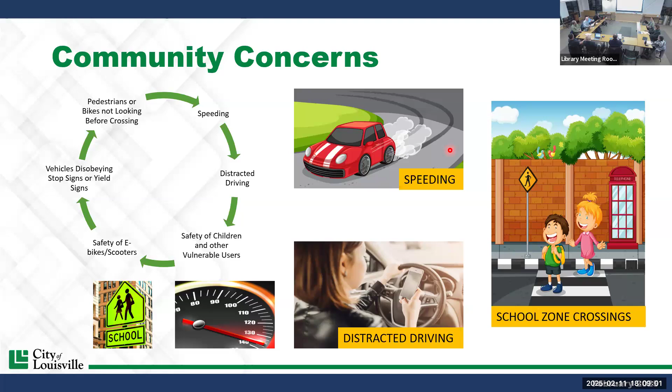Cover a little bit of the terminology here that you'll see throughout the slides. So all ages and abilities, we go from 8 years old, which is about the beginning of independent bike riding and walking here in town, up to 80 plus year olds. When we discuss the 85th percentile, that's the speed at or below which 85% of drivers are traveling. It's a metric that we tend to use for gauging. It's an industry standard, and it's a gauge for vehicular behavior and observation of traffic laws. Yes, sir. Is that the middle or is 15% above? So 85th and below will be what we look at. 15% are going to be in excess. Just want to know where the curve was. Yeah, thanks.

And then we're going to talk a little bit about the ADT, the average daily traffic, which is the amount of traffic on the street each day. FHWA is the Federal Highway Administration. They provide a lot of the public funding that we see, federal dollars. They administer that, but they also administer and keep track of and make recommendations that we'll touch base on a little bit later, countermeasures, traffic calming, traffic safety, and try to set a standard nationally. And then the TMP, it's our Transportation Master Plan adopted back in 2019.

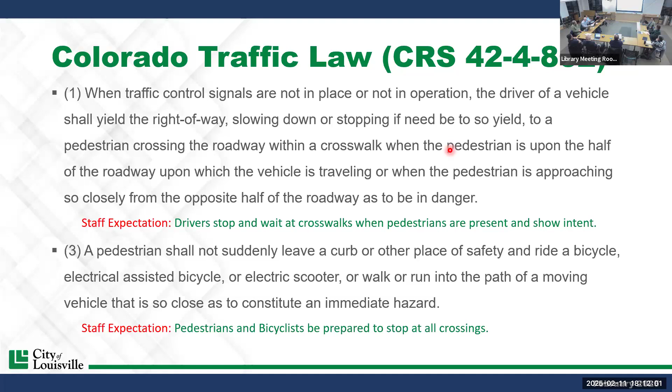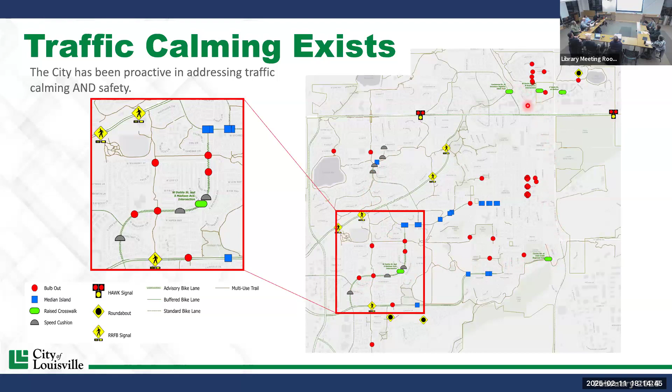Next, we'll touch on some proven safety countermeasures. So this is FHWA. In this slide, you can click the link. We could share that link if you guys want. You can also Google it. And there's 28 of them currently that are a variety of ways to improve safety on the streets.

These are examples of some that exist here in Louisville. So we've got RRFBs, the HAWKs, again, the raised crosswalks. These median refuge islands allow people to make a decision point in one direction, get to a safe place, and then make a decision point again the other way. One thing to note, just on the HAWKs and the RRFBs, is we do not recommend that they get mixed on the same corridor. Yes, Chris, go ahead.

Can you just, for the sake of everybody, explain the acronym? It is, thank you for that. Yeah, so an RRFB is a rectangular rapid flashing beacon. So those are the ones that when you press that button to cross, it gives you a blink. And what that is intended to do is alert drivers that your intent is to cross the street. While a driver is not required to stop until you've entered the crosswalk, it is ideal, it is the expectation of the community.

And the difference between that and a HAWK signal is a HAWK signal operates a little bit more like an actual traffic signal. It goes dark, and then you push the button, it'll go to yellow, then it'll go to red, it goes to its flashing sequence, and that's okay. Just like a traffic signal, when it's flashing, it's a stop sign. Does that help?

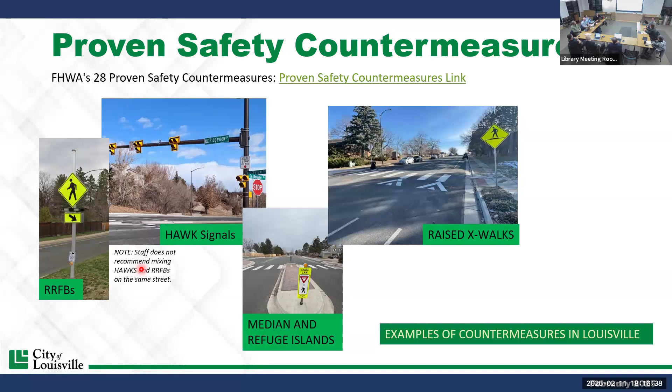Let's see. So next up, we've got some focus areas. So these are areas that we take into consideration for a variety of topics. So when we get those community concerns, we get a traffic calming petition, these are some of the pieces and elements that we're going to look at in evaluating the corridor or the need maybe for some improvements.

So again, speed management's a priority. Reducing vehicle speeds significantly decreases crash severity and improves pedestrian safety. Part of that is speed, obeying the speed limits and the traffic laws. And what we can do with an engineering aspect is try to kind of force that a little bit, and there's some elements that we can do.

And we've got pedestrian and bicycle safety to make sure that there's safe crossing options. Bike lanes, buffered bike lanes, protected bike lanes, and then the visibility for the vulnerable road users. So we also have to keep in mind we have those young cyclists, those new kids using whether it's e-bikes or their own bikes, seeking their own little bit of independence in the world, and so we've got to make sure of those. And then we also have disabled users, vision, wheelchair. So multiple users that we're trying to design our roads for, and sometimes those are competing interests.

Another topic is intersection safety, improving the signal visibility from the standpoint of traffic coming through at night. You get those little reflective visors that are starting to come in, those help. The LEDs, the brightness of the actual signal itself. And then of course the countdown timers and all the other pieces that work for a variety of disabled users or able-bodied people for when it's safe to cross.

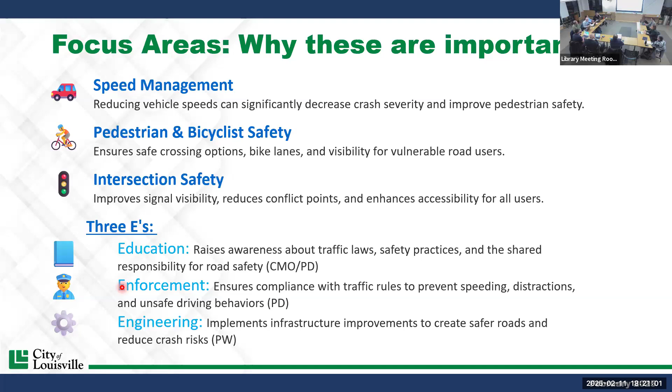Touched a little bit on intersection safety a few moments ago, but the visibility of the traffic signals is important. The ability for blind, disabled users to cross, those audible push buttons are very, very helpful. Make sure we see right-of-way compliance, and right-of-way meaning you come to an intersection, is it your turn to go or someone else's. We see those competing interests sometimes at four-way stops where it's not always known whose turn it is to go, or you come up to those local streets where stop signs aren't required or needed, and you have to make your decisions on traffic law.

But I'll note here, in the middle, a little time just to kind of brag. So this is one of our staff here in engineering, Michael O'Keefe. A local mobility company reached out. We have a blind user in town who wanted to see some improvements out at South Street with the audible push buttons.

Alerted us to one of the push buttons that was not functional. And we were able to go out and experience it, put a blindfold on, put that cane in our hands. And if y'all have never done that, I would highly recommend it. It's enlightening, scary as heck. I mean, that's Highway 42 right there at South Street. And we went across both directions.

We experienced people honking. So right here at this crosswalk, our traffic signal maintenance company, their project manager also came out and joined us, and he was doing exactly what Michael was doing and struggled really vitally to get across accurately. Car right here was laying on the horn and yelling some pretty nasty things. So we got to experience the hostility while we were out there doing this.

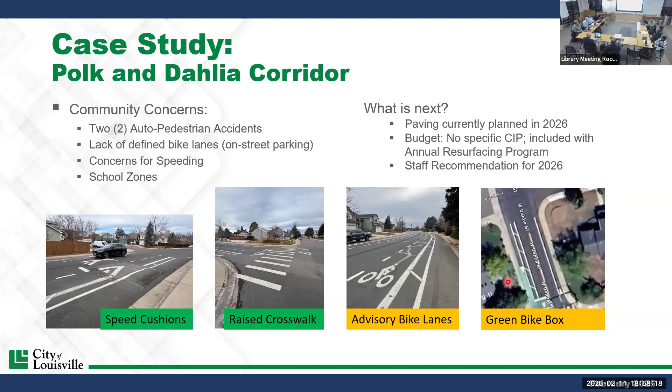Currently, we don't have any specific CIP to address any of these recommendations, but most of it falls within the normal resurfacing CIP budget. And so then we'll make that recommendation to make those approved in 2026. What I would say too on this, for questions, will be probably a great time to summarize at the end of each case study before we jump into the next one. So feel free to interrupt me, certainly entitled, but just keep that in mind.

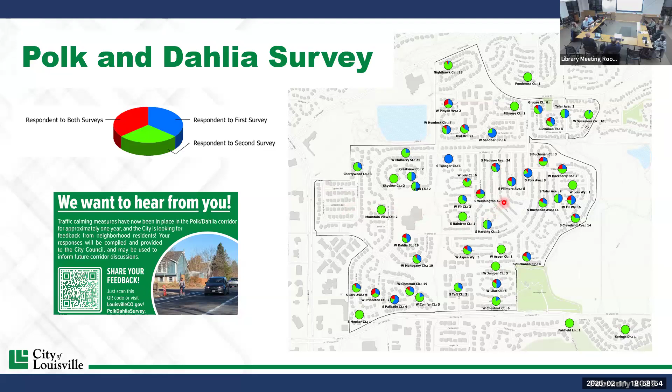So Polk Dahlia, we did a pre-implementation survey and a post-implementation survey. This slide here kind of shows you a mix: the blue is who responded only to the first survey, green is only to the second, and the red shows both. So pretty good mix of results. Touching base, so this is a feeling of what was installed. What are people's overall thoughts on what we did?

So initially we asked, hey, is there a speeding problem out here? On this left slide, out of 119 survey responses, 71% of the respondents said, yeah, we have a speeding problem. We then followed up at the end, after we implemented this and it was in place this past fall, we put out another survey, and 65% believe the speeding problem does not remain. Then we asked a couple of questions, again, pre and post.

Do you think pedestrians and cyclists are practicing safe habits? Safe habits can mean crossing. Are they looking for the lanes? Are they riding in the bike lanes? Are they riding in the parking lanes and weaving into the driving lane? And so this was a pretty open-ended question with, again, the green here, majority of people before the implementations thought that pedestrians and cyclists were practicing safe habits.

After, we actually got kind of a surprising result that more people thought pedestrians and cyclists were not practicing safe habits. That may be a little bit more citywide. We are finding that throughout the city that is now a concern. We have a lot of children, a lot of adults that aren't really coming to a stop and making sure they're safe to cross before entering. We don't know if that may be a global trend, but it is a little bit of a different result here on Dahlia. Do you have any of the specific comments that were shared?

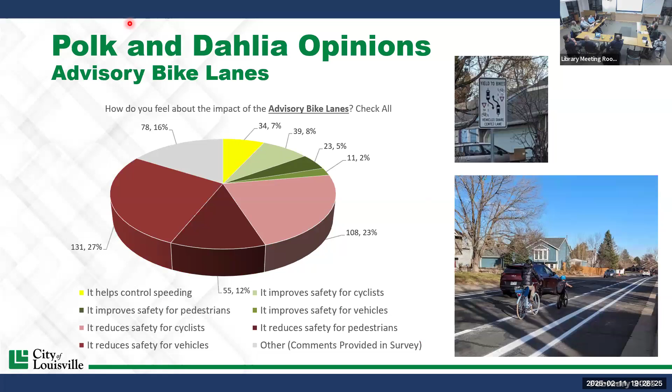I think it's about the whole corridor, and this is just a benchmark. This whole corridor carries about 3,000 cars per day. It's been out there for over a year, so do the math, that's a lot of cars. We haven't had any accidents with cars or people or bikes, despite some of the results we received. The speed data suggests people are going slightly slower, but not dramatically reduced speeds. But the perception is that there's not speeding now, when before there was. So by that account, because the reason we did this was to improve safety, we have improved safety.

That helps. Why don't we continue on, because I know you still have some slides. I really appreciate all the input. You guys have been great. I know everyone wants clean thresholds, like we should do this now or not do it now. But we are in some areas getting into levels of comfort, which is subjective, and so we do have to do a lot of reading minds to figure out what the right balance is. So this is all good.

One thing I'll add is the bikes have always been there, right? And so we add this dashed line, follow my little laser pointer here. One of the things that's a little bit unique about the Polk Dahlia corridor is it does have on-street parking. Cyclists often assume that that's a bike lane, or just want to be comfortable, and they're over in that lane until they come up on a parked car. And then in the past, without the lines we put out there, they would move unpredictably, not necessarily into oncoming vehicles, but into vehicles traveling in the same direction.

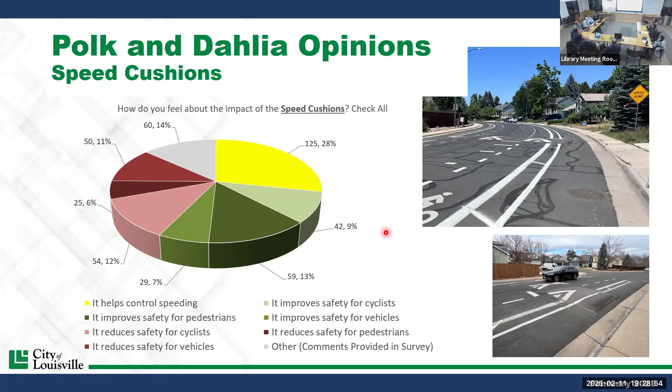So take away the speed cushion slide here for benefit. The bike lane only, the advisory bike lane versus a share the road situation. They're both kind of safe. They're both safe, right? The reality is what's more comfortable. What does the community want? What's out there? What do you all feel is the right thing? And this is one of those we can kind of submit a little bit to whatever our opinions are. And that can vary honestly between our professional and our personal opinions. So let's keep that in mind.

So one unique thing is we have to make sure that these crossings stay compliant with ADA accessibility guidelines. We have to make sure we ramp up at that 5% or less, and 2% cross slope or less, so the wheelchairs and of course the visually impaired have safe crossings. So that's kind of hard to really have too much insight into. It exists.

Barb, let's go. There's a question from a Councilmember. Yeah, thank you. Can you go back to the last slide, please, with the pie chart? Which pie chart? This one's fine. I didn't add up all those numbers, but I'm trying to figure out how to interpret this. Is it a pie chart? Because can people select more than one answer? Yeah, so they can select more than one, so it'll add up to more than the 199 that we got. Okay, thank you.

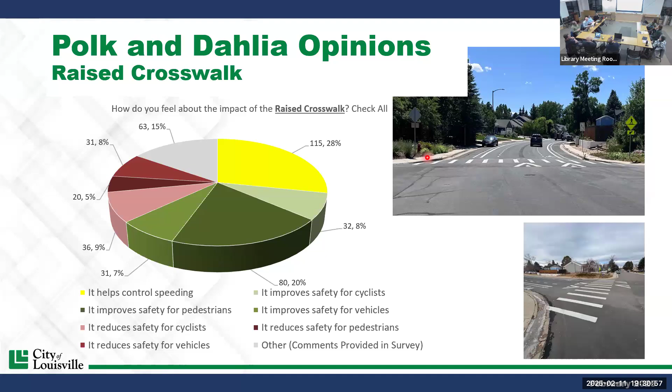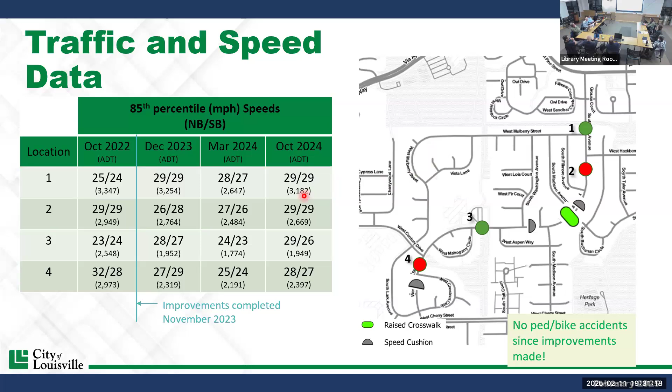Talked about the speed data. We saw an initial significant improvement in reduction, with the speeds creeping back up a little bit in the latest rendition, showing that people are getting a little bit more comfortable out there driving. So what's next? Again, recommendations that'll come with likely the 2026 resurfacing. This is kind of our feeling as staff from what we had observed from the input. We are open, obviously, to your input.

We would recommend installing the raised crosswalks at Madison, keeping that, reinstalling it once we pave, because we'll be milling everything off. Resurfacing, install the speed cushions at the same locations that exist today. Based on the feedback, initially, we're probably recommending no advisory bike lanes, more of a sharrow scenario, maybe with or without the yellow line that we see in this example here. Again, open for interpretation and feedback there.

And then the bike box that closed the through and right turn lane and made this left lane a through, right and left, and required the no right on red. At this particular location for the bike boxes, I've received no positive feedback on it, to be honest. I have received positive bike box feedback, maybe at McCaslin, a little bit more appropriate of a situation for it. But this one, I'm pretty strongly in favor myself of removing it. It just creates a lot of people taking the right, using that bike box, and I think it's creating more of an unsafe situation.

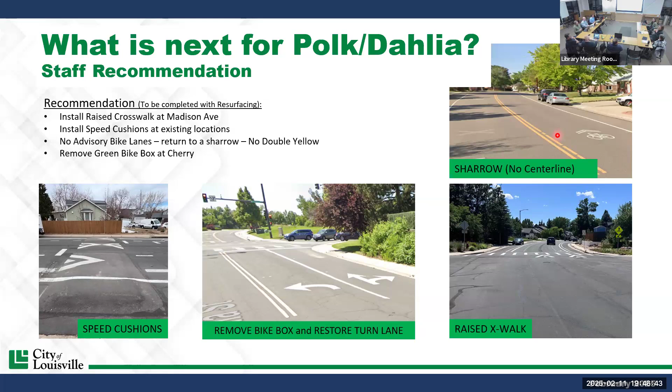Right. So, yeah. Are you taking public input? Not tonight. Right, about the middle of the road, right? Yeah, we're not taking public input. We will get public input. This is just an update. I'll send it to you about biking on the line. I appreciate that. Should we move on to the next topic? Should we keep going? Keep going. Let's go. Next slide.

All right, next traffic case study was Via Appia. We had, as you mentioned, a lot of community concern of speeding. It's difficult to slow down different side streets, pedestrian safety, comfort, crossing the street is a challenge. Then, of course, the place in which safety and comfort was not ideal. We held multiple on-site meetings on March 7th, morning and afternoon, and also held that meeting on March 11th to discuss some of the improvements to be made.

We ultimately were approved to put in the buffered bike lane. That's what this is showing on this picture here, with the buffer between the single lane of traffic to narrow this down to one lane in each direction. We also put this thermal bike box, which allows the cyclists that want to make a left turn to stay up here and navigate, get around the front of the traffic at a red light.

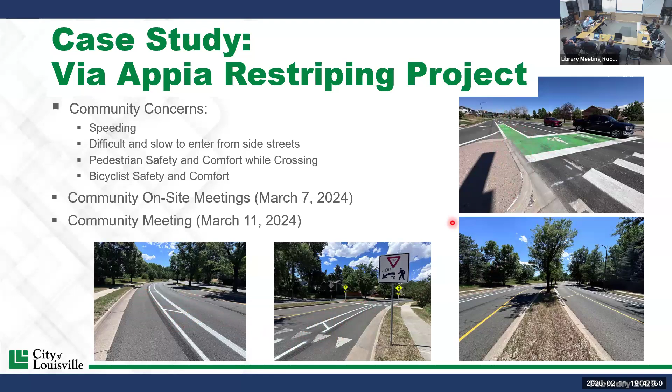So what guided this? Our objective was to enhance the safety and comfort for pedestrians, cyclists, motorists along the corridor through targeted improvements. It's a balance. Pedestrian, cyclists, motorists, it's a conflict, it's tough. So what guided these decisions? Well, we had 26 crashes on the corridor from 2021 to 2023. 11 were rear ends, 2 were injuries to cyclists. We wanted to make sure that this aligned with the FHWA's safe system approach that we covered early on, and we wanted to leverage those 28 proven countermeasures.

So we introduced that lane reduction modification, the buffered bike lanes, and then we installed a new RRFB, which is that rectangular flashing beacon at Eldorado, to bring visibility to the pedestrians crossing. All of this was supported with recommendations within that 2019 adopted transportation master plan. And these were multimodal improvements to make a safer street for all ages and abilities.

Some initial feedback and data that we've received in our collection points. Before our road improvements were installed, we were seeing eastbound, westbound 43, 41, with a reduction down to 38, 37 around this area. So we're seeing anywhere from 3 to roughly 4 miles an hour at location 1 and 2. Location 3, where it does jump into that 30-mile-an-hour zone, we're still seeing speed just a little bit higher.

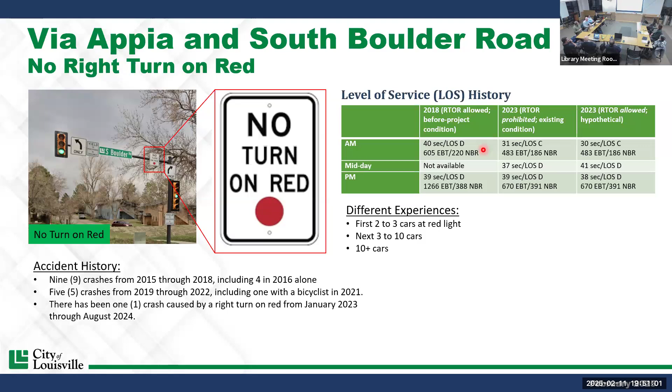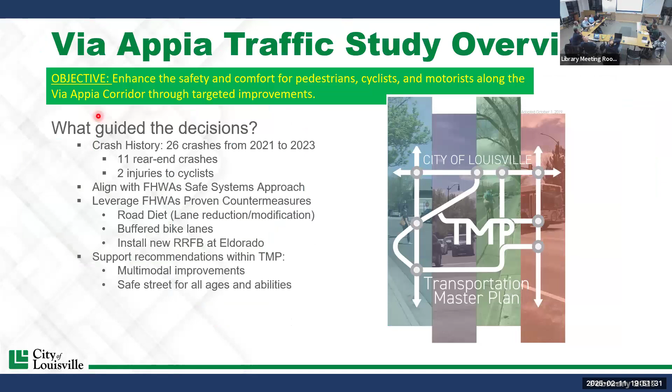Go back a couple of slides to the speed slide. Yeah. I really appreciate it. I started off saying location one, wow, that's exactly what it was, right? That reduced it by 5 miles an hour. And then a little less, still not doing bad on the second location. On the third location, just not much change. There's a speed transition right there. Yeah, I mean, is that what you would have expected?

Yeah, we forecasted that if we did this project, we'd slow speeds down 3 to 5 miles per hour and add comfort to the corridor, and we've slowed speeds down 3 to 5 miles per hour and we've added comfort to the corridor for most use cases. I also want to throw out there that it doesn't look like there have been any fewer cars driving. This has not impacted traffic volumes at all.

I shared this with Kurt already, but at our Ward 3 board meeting a couple weeks ago, we got only one comment from Via Appia. And it was a long comment, but it ended with whoever designed the new road was a genius. So for what it's worth, but totally serious, totally earnest. I think she had been confused by it or skeptical of it at first. What a better experience it is. It's a credit to these traffic engineers sitting here.

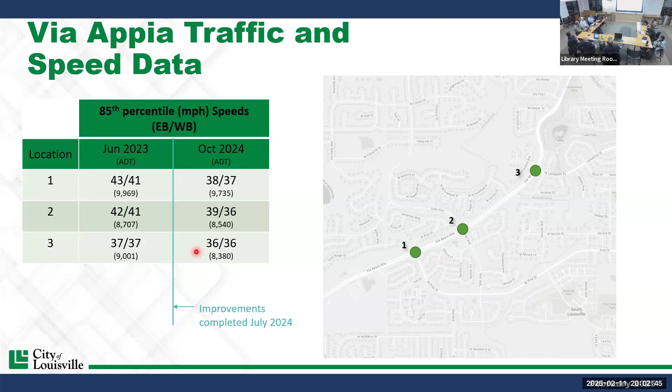To the point that Councilmember Kernan was mentioning before about the danger of rear enders and stuff like that, that might happen if somebody's speeding up to a car going the speed limit. Have we had more or fewer, I mean, can you tie some of what you've got here to an increase or decrease in rear end accidents? To my knowledge, I don't think we've had any rear end accidents, or very few. I don't have that data memorized for this, but I believe our crash history has come down. Do you have that? The accident, yeah.

The same day as the fatality, there was a rear end at Coyote Run, like the same time. At the beacon, right. So, yeah, we had those 2 accidents through that transition period. But I think since then, I don't think we've had the same pace of accidents, maybe even more reduced. I thought we had that in the presentation, but we don't. We'll get that info for you. But we have not seen an uptick in rear end accidents. Councilmember Kernan, I know you were gonna follow.

Thank you. So the other concern that we hear a lot is that people are having a very hard time turning onto, well, not a hard time, it just takes longer, nobody wants to wait for 15 cars to go by. It used to be like 5 cars would go by and then there'd be a break because it's 2 lanes, and then they can turn onto Via Appia. And now, because it's a single lane of traffic, it's taking them so much longer to turn onto Via Appia because of that long chain of cars.

And we're hearing that at Pine, and Eldorado, where you put the flasher, which is great, but it's hard now for people to turn left out of Eldorado. In fact, I've heard of some people there turning right, going to the police station and flipping around, or flipping around at the light, because it's just so hard to turn left. But Pine is where I still hear a lot of people having an issue trying to get onto Appia because it takes so long now instead of groups of cars going by.

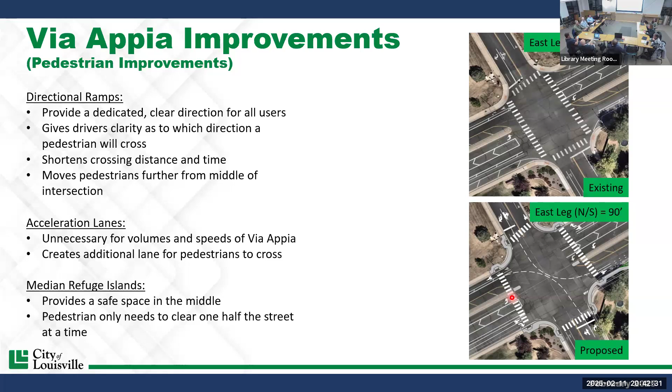One other question, and this is just kind of visual. Dreams. Is there any way that you can straighten the road? Get rid of those curves? Yeah, out of the box. Unlimited budget conversations are always fun.

So, yeah, I think we can take all this into account. These guys and girls are really good at drafting things up and revising what we may have done to add what you've said today. What we're hearing is you want to continue down this path.

Possibly preserving the ability to, in the 10 or 20-year framework, if you need more lanes, you can review that. So very little disposable concrete. Don't want to mess with evacuations. I think that's the gist, is what I'm hearing. I think, Catherine or Karen, did you have?

Thanks. I was just going to add one more thing, since you're on the improvements on the right turn lanes. You had mentioned a year ago, Kurt, that if not in the first striping, but in different phases, you would consider or find a way to maybe allow people to do a right turn into the rec center, so that people could go around them. Is there any plan for that yet? Or does that have to be part of what happens in '28 with the final plan?

I mean, that's one we could do in the interim. Yeah, that adds some visual; that's never had a right turn. Right, we'll have to look at how it affects the sidewalks. Is it doable? Yes. Do we need to do some design work? Yes. It could be done in the interim for a right turn into the rec center. And then also just emphasize what Jeff said at Church and the right turn lanes, we'll bring them back. Sure. So Church, Tyler, Pine and Church had the right turns.

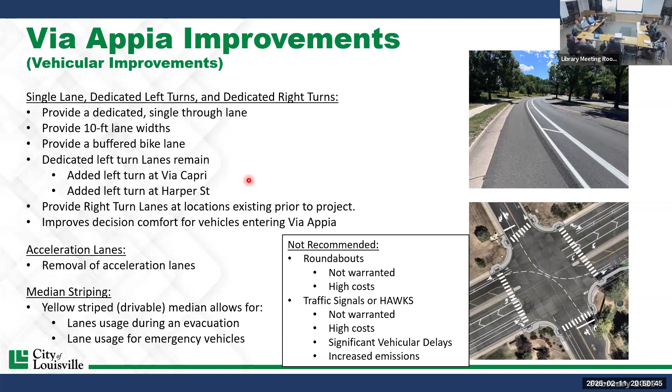So I just wanted to throw that out there: with these improvements coming over time as is most efficient and necessary, and us prioritizing our limited dollars on the most dangerous crossing in Louisville. And I doubt it's on this road. I don't know where it is, but I doubt it's on this road. So that's just one thing I want to throw out. Kurt, do you guys have what you need from us on this? I think we do for this iteration, yes. Why don't we move to the next? Of course.

So this brings us to probably one of our last slides, photo enforcement. A lot of communities are starting to bring this up. There's two different types of photo enforcement. This is just gonna be a quick education. You've got traffic signals, red light monitoring, and you have your speed and traffic enforcement. So pros, you're gonna see improved safety because it's deterring speeding once it's known, especially the mobile units, and the chief can probably chime in if he's still on, looks like he is.

Those mobile units can be purchased and owned by the agency, but there are also third parties, which gets into a whole other level of conversation. It's consistent, it's unbiased: you're speeding, it doesn't matter what color car you're driving or anything like that. Efficient use allows staff and resources for PD to put their officers in other capacities. The evidence is objective and encourages compliance.

Cons: resident privacy concerns. There is a pretty strong negative public perception that comes with these. There are still some ongoing legal challenges, just to make sure those get explored. And initial startup costs can be pretty high, but there's probably a pro there, that there's value to that. And then there's context violation. So if you're at a signal and you're running a red light because of an emergency vehicle, you have nowhere else to go, and you're jumping out in the intersection. Flash, you got a ticket. It's hard to go through some of that.

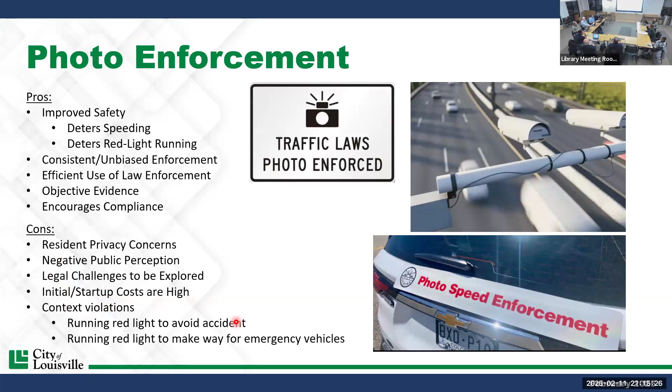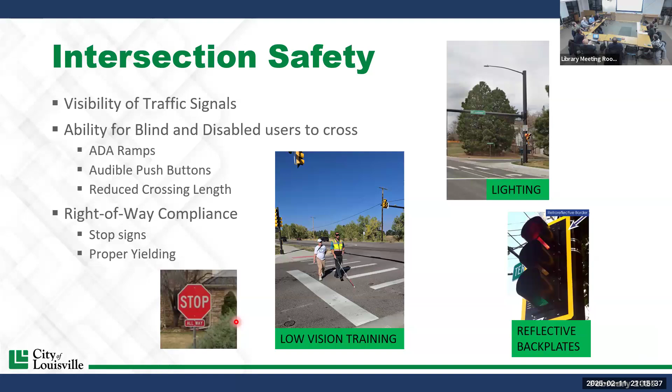And have you thought about behind the middle school on Jefferson? I've had people complain about speeding on Jefferson. It's like at Jefferson and Griffith. So the question will be, are we trying to slow people down, or are we just trying to have a safer crosswalk? Because one side we thought about putting one there because people think people are going too fast. Different problems. Yeah.

What I would challenge with a lot of these too is most of this is started with some level of discussion. Or you have a traffic calming application that the community can apply for. So going back to Madison and Juniper, we had a resident there that spearheaded close to 50 signatures on that. And so at that point, we'll take out those speed counts to investigate whether it's a perception of speeding or if it is speeding. And we'll also monitor the crossing behaviors of the students and people crossing at those locations, and see if there's an opportunity to make that.

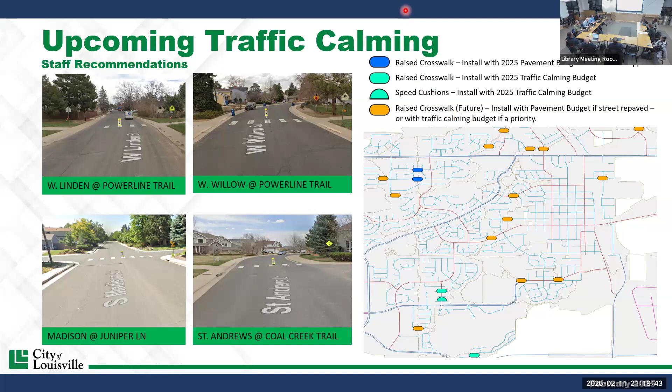Second. All in favor? Aye. Nay. Member Hamilton, were you gonna say aye too? Sure. Aye. Thanks for your time. Thanks, folks.